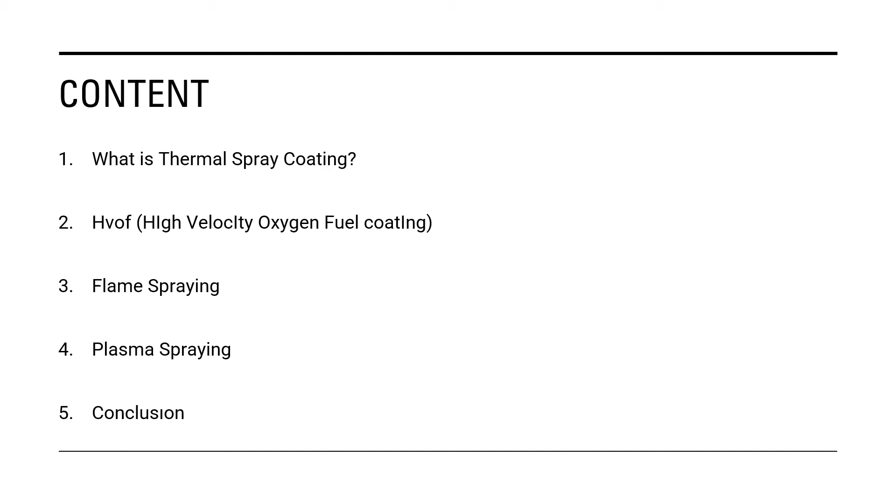Okay, what am I going to talk about? First of all, what is thermal spray coating? After that, I'm going to talk about high velocity oxygen fuel coatings, flame spraying, plasma spraying, and lastly, I'm going to make a brief conclusion, and after that my presentation will be over.

Thermal spraying can realize ceramics or metallic coatings which do not have the same properties as the substrate.

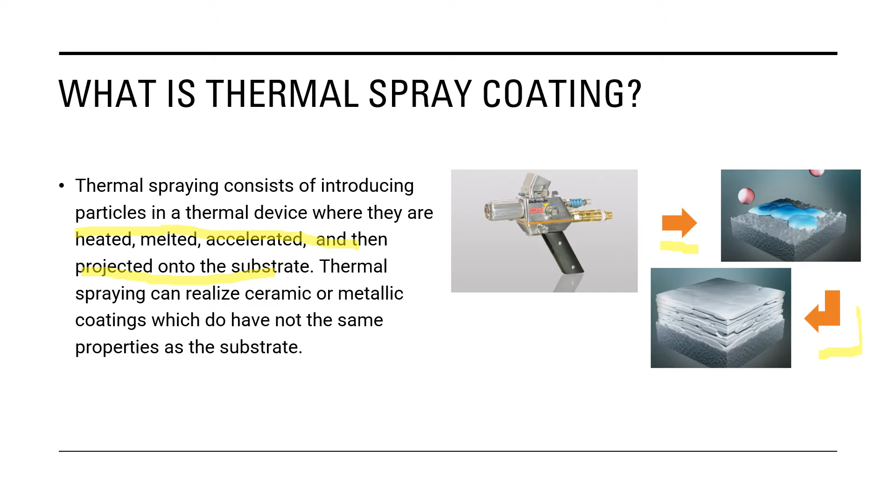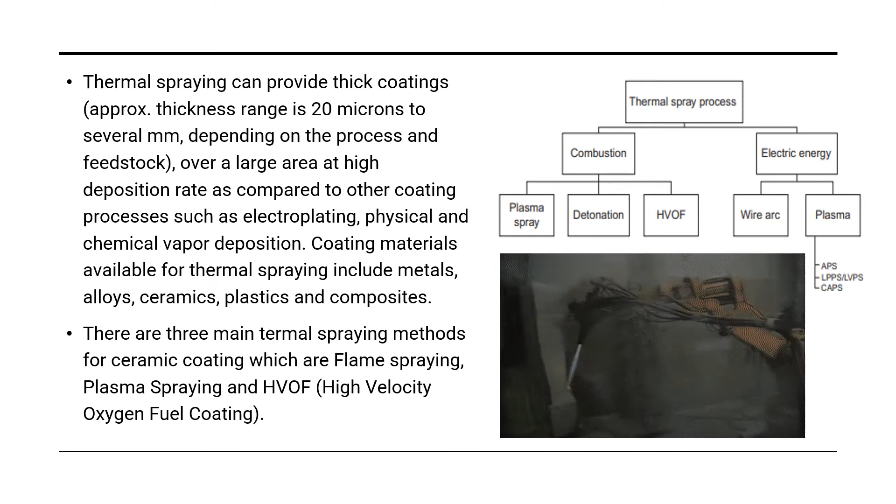Thermal spraying can provide thick coatings. The approximate thickness range is 20 microns to several millimeters, and it can do that over a large area at a high deposition rate as compared to other coating processes such as electroplating, physical and chemical vapor deposition.

Coating materials available for thermal spraying include metals, alloys, ceramics, plastics, and composites. There are three main thermal spraying methods for ceramic coatings: flame spraying, plasma spraying, and high-velocity oxygen fuel coatings.

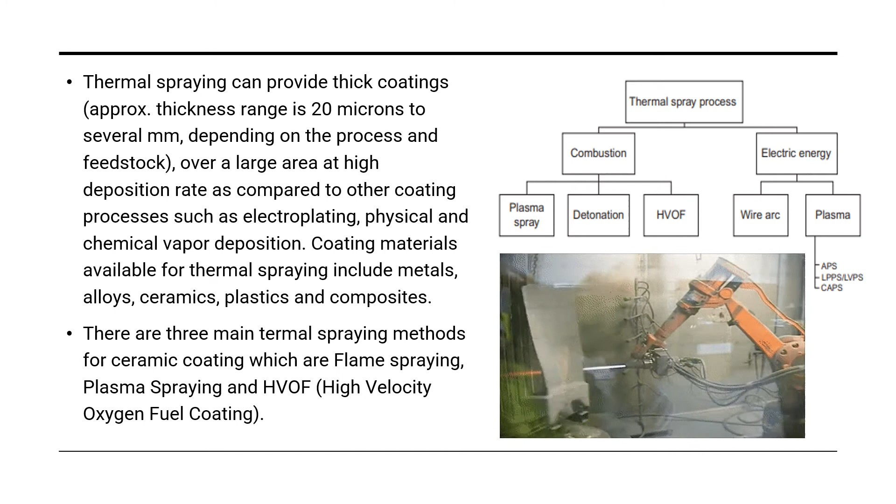For example, it could be used in gas turbines, and chromium oxide for corrosion resistance, oxidation, abrasive wear resistance, smooth surface and hard coatings.

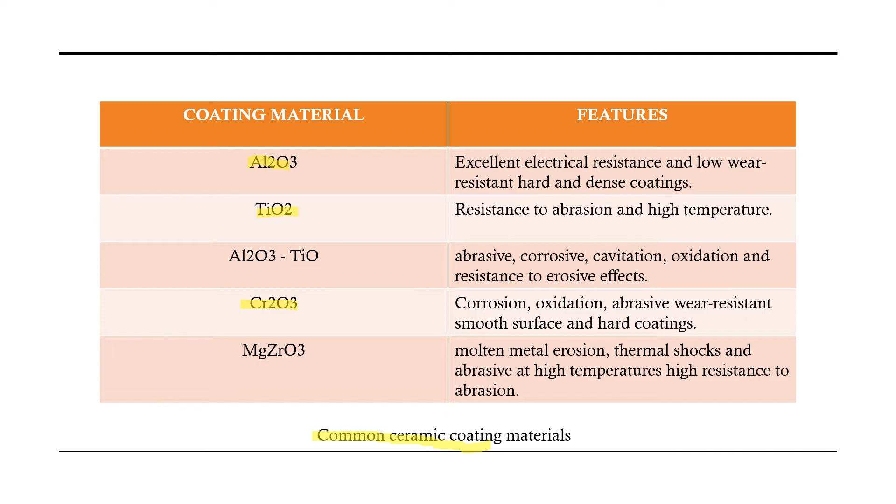So let's talk about high velocity oxygen fuel coatings. This method is one of the newest of the thermal spray coating methods. This method uses high pressure oxygen and fuel gas, and the gases used are usually propane, propylene, and hydrogen.

The burning gas mixtures reach supersonic speeds, and the coating powder is fed into the flame. High-velocity oxygen fuel maximizes kinetic energy while minimizing thermal energy input. Thus, coatings with high bond strength, dense, and low porosity are obtained.

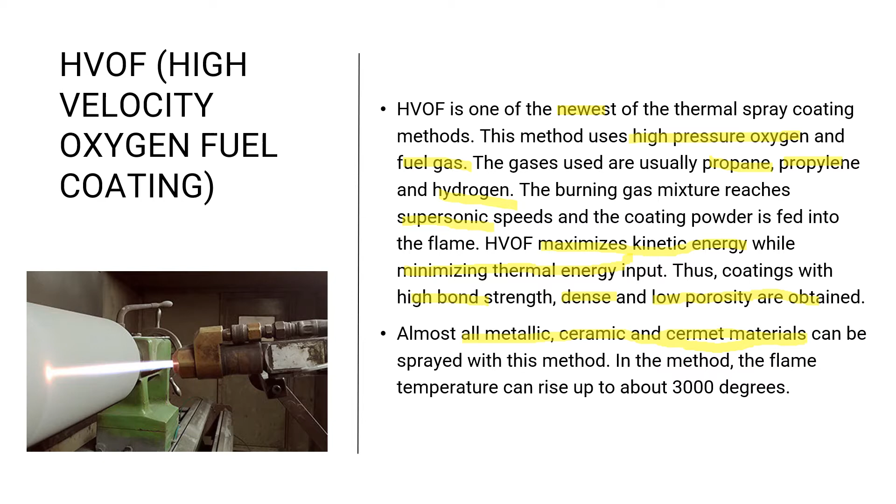Almost all metallic, ceramic, and cermet materials can be sprayed with this method. In this method, the flame temperature can rise up to about 3000 degrees.

Okay, but how does it work? In this method, fuel, which could be a gas or liquid, and oxygen meet in a combustion chamber. At the same time, the powder material in the carrier nitrogen gas is sprayed into the combustion chamber. After all valves are closed, the gas mixture is ignited by an ignition plug.

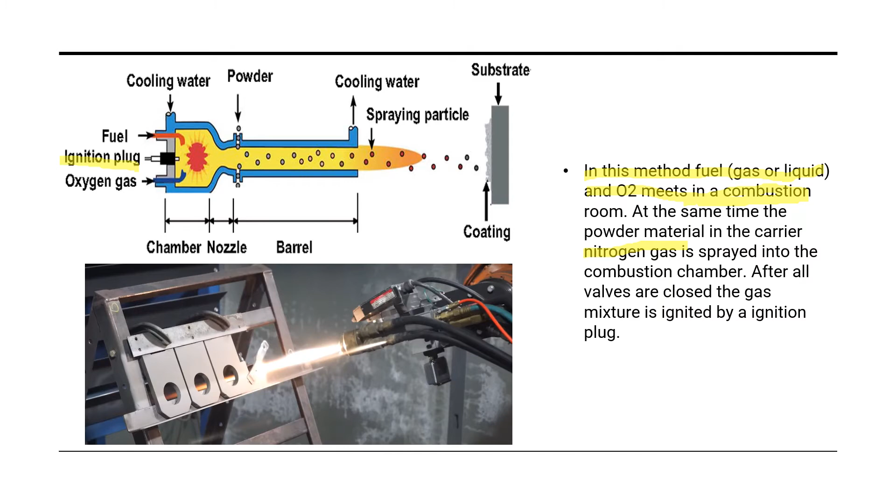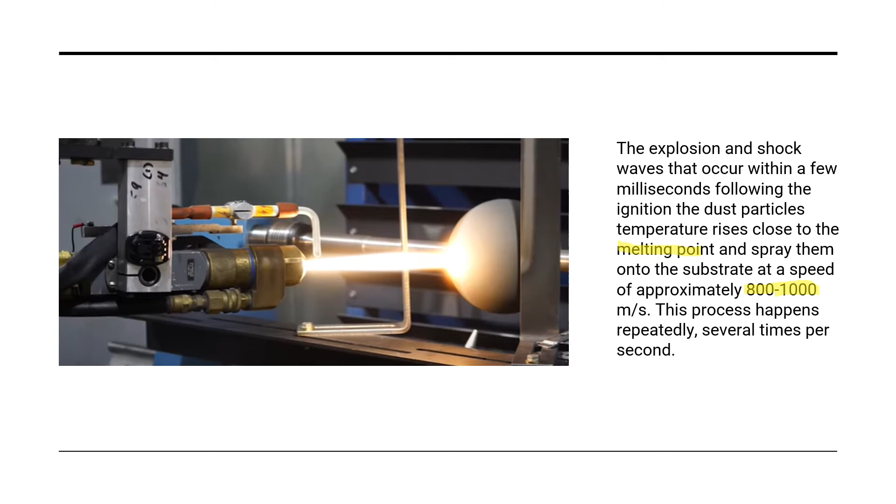The explosion and shock waves that occur within a few milliseconds following the ignition cause the dust particle temperatures to rise close to the melting point and spray them onto the substrate at a speed of approximately 800 to 1000 meters per second. This process happens repeatedly several times per second.

Okay, the biggest feature of this method is that the surface of the main coated material, at the same time of spraying, does not exceed approximately 100 degrees. This method provides very high density and high bond strength coating.

High velocity oxygen fuel coatings may be as thick as 12 mm. It is typically used for depositing wear and corrosion resistant coatings on materials such as ceramics and metallic layers.

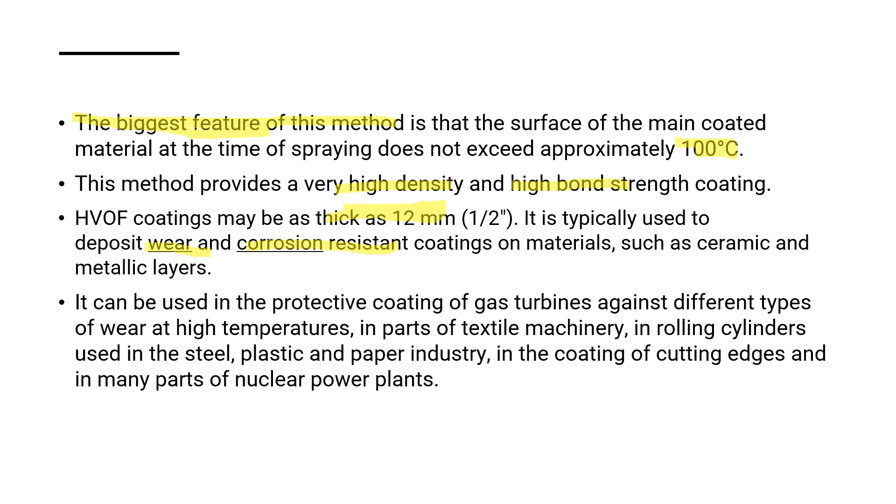It can be used in the protective coating of gas turbines against different types of wear at high temperatures, and in parts of textile machinery, in rolling cylinders used in the steel, plastic, and paper industry, in the coating of cutting edges, and in many parts of nuclear power plants.

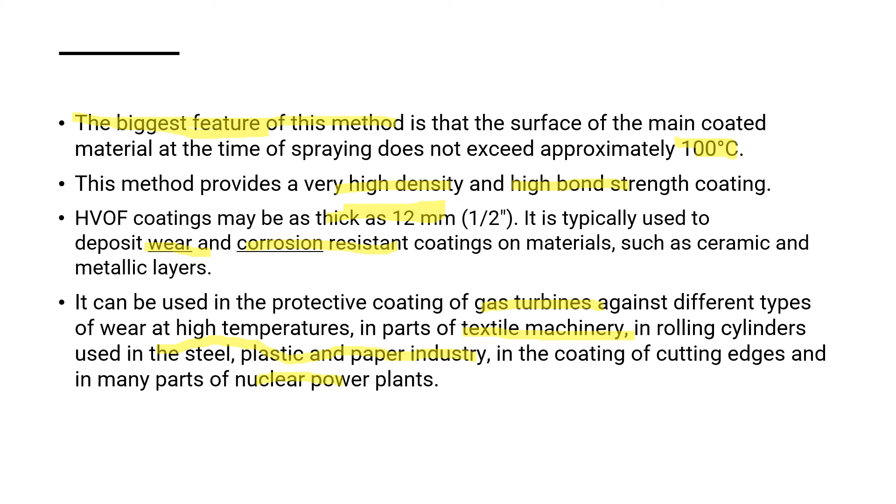So let's look at flame spraying. The flame spraying method is the oldest of the thermal spraying methods, and it's still the most used today. Flame spray guns can spray coating materials in the form of rods, wires, and powders.

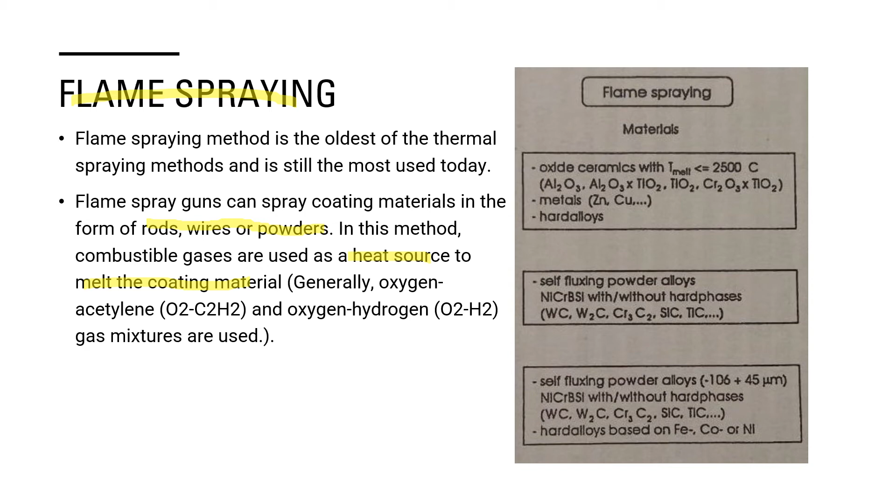In this method, combustible gases are used as a heat source to melt the coating material. Generally, oxygen-acetylene and oxygen-hydrogen gas mixtures are used.

In this method, the powder material is fed by effect of gravity from a feeder on the flame gun and transported to the nozzle of the gun to be collected and melted with the help of carrier gas. Here the melted powders are sprayed onto the substrate to form a coating.

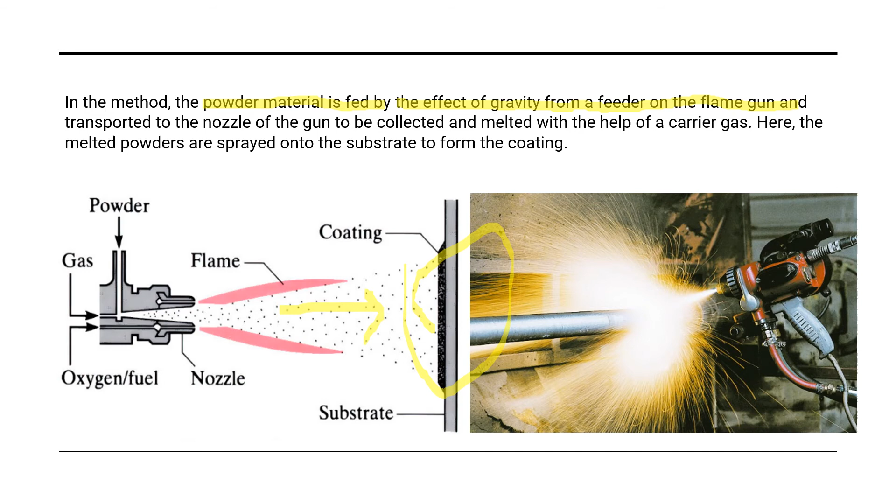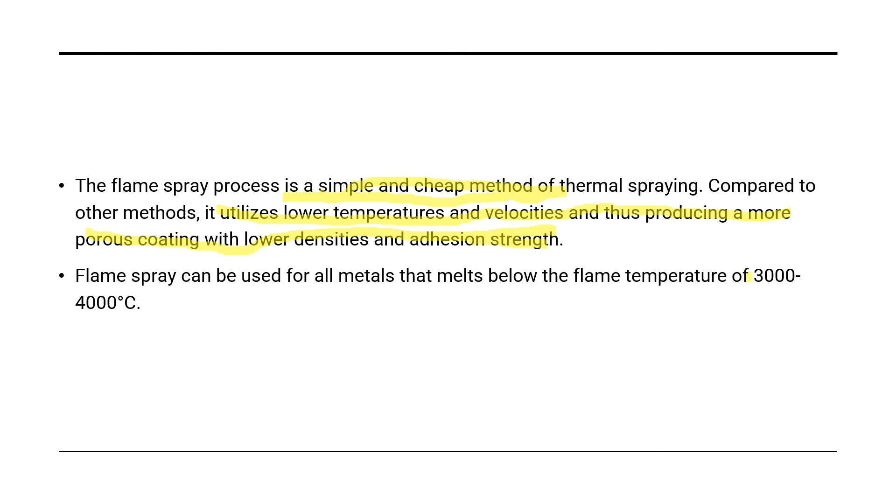The flame spray process is a simple and cheap method for thermal spraying. Compared to other methods, it utilizes lower temperatures and velocities, thus producing a more porous coating with lower densities and adhesion strength. Flame spray can be used for all metals that melt below the flame temperature of 3000 to 4000 degrees.

Okay, let's look at our last method, the plasma spray method. Plasma spray uses electrical energy to create a plasma flame for heat input.

In this method, an electrical arc is created between a tungsten cathode and a water-cooled copper anode. This arc ionizes suitable gases and transforms them into plasma. This causes a very, very high heat input on the particles combined with a high-velocity gas stream.

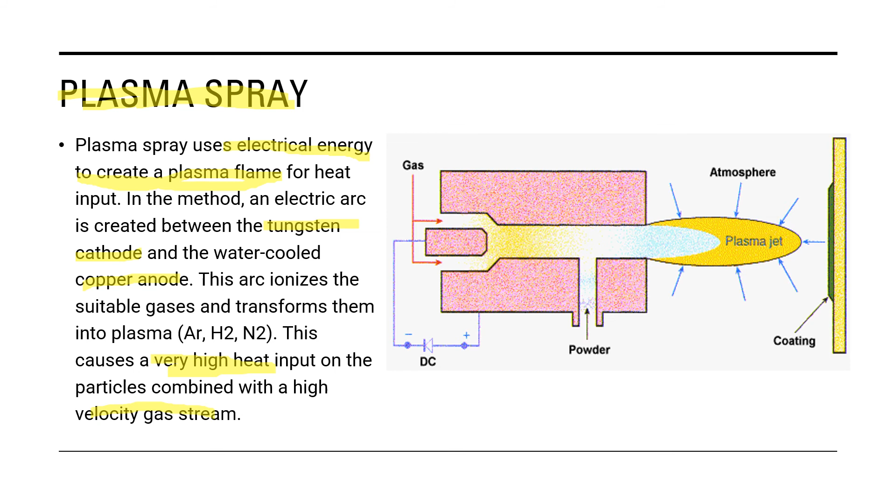There are two types of plasma spray: atmospheric plasma spray and vacuum plasma spray. Vacuum plasma spray is performed in the absence of oxygen. This gives a coating with a lower amount of oxidation, in addition to generally better coating properties. However, vacuum equipment is more expensive compared to atmospheric type.

The plasma can reach temperatures up to 15,000 degrees, which is above the melting temperature for most known materials. With this method, oxide ceramics such as alumina, titanium dioxide, chromium oxide, and zirconia can be coated easily. The high degree of melting combined with high velocity gives coatings with high density and high bond strength.

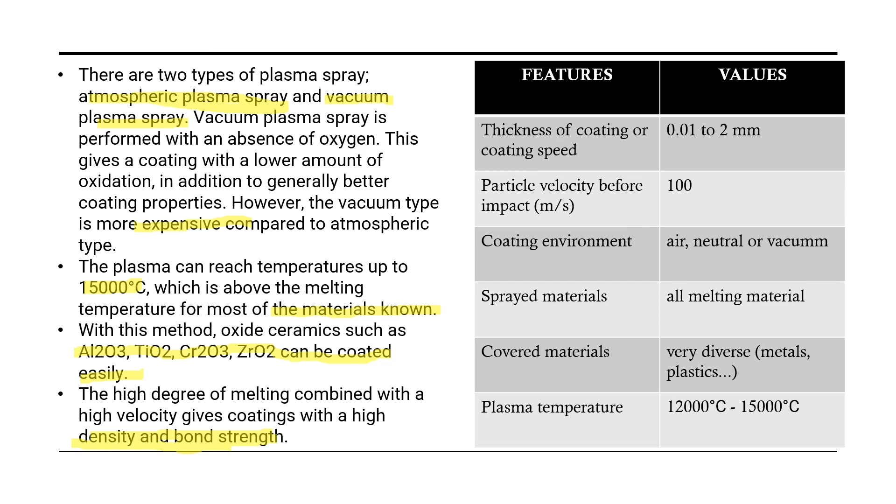Okay, let's make a brief conclusion. Thermal spraying is one of the most advanced hard-facing technologies for surface preparation and protection. The diversity of thermal spraying processes used for hard coating is due to a variety of applications and required properties, as well as economical aspects.

A systems analysis of thermal spraying for hard-facing purposes shows common advantages like little restriction on the shape and materials of the component to be coated. The limitations are relatively low bond strength and degree of porosity.